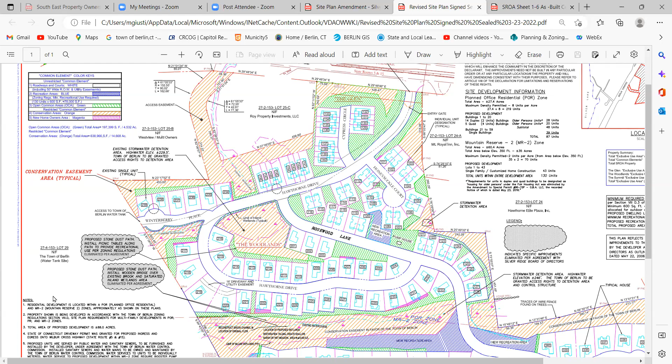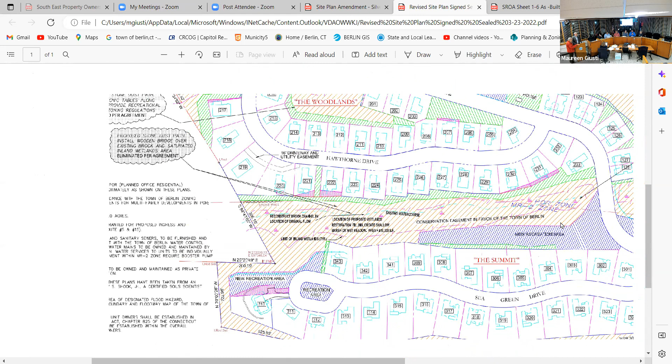We surveyed every aspect of the common areas beyond the lots, the units themselves, and determined that where there were some finished common elements with park, landscaping, trees, and the like, we were able to reconfigure and make sure that there was enough recreation area to satisfy the zoning requirement of 600 square feet per unit. So we had to relocate one of those areas, being landlocked and effectively totally unusable, to where there was finished ground that could be used for recreation purposes.

In doing so, we were able to delineate all of the conservation areas that were supposedly intended by reference to the lot line, where the woods would start or where the brush would begin. So this is what the new site plan in front of you shows. I'll get to that in a minute. Right, but that's what we did.

All right, can I just follow this clearly through its history. If I remember correctly, and I'll look at Tim, who served on the commission before, there was one developer that came in with the initial idea and then something happened, things were stalled out. Were there parts of that development that weren't built, or was this whole thing built up all at once?

At the very least, it was built in phases. I don't know if there was ever a different developer to start with. I know Mr. Klepacki was the developer I was aware of that was involved in the project. There was a change midway through to add 11 units, but other than that, I think Klepacki was it. All right, so that's probably what I'm thinking of, a change in developer.

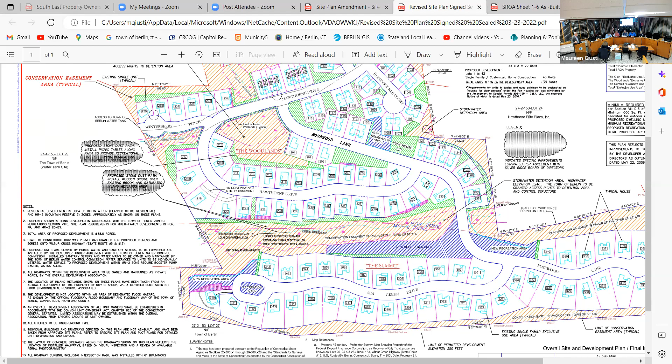Okay, so I'll go through there. The site plan that's amended does depict the conservation easement area boundaries as built, based on landscaping conditions. It changes the boundaries of the units to put the improvements within them like they were supposed to be in the first place. There's some orange wedges or triangles you'll see - we extended the boundaries of the end units of the Glen to include the utilities and landscaping, things that need to be part of the units there. And as Mr. Lamontagne mentioned, it relocates some of the recreational areas to a usable location.

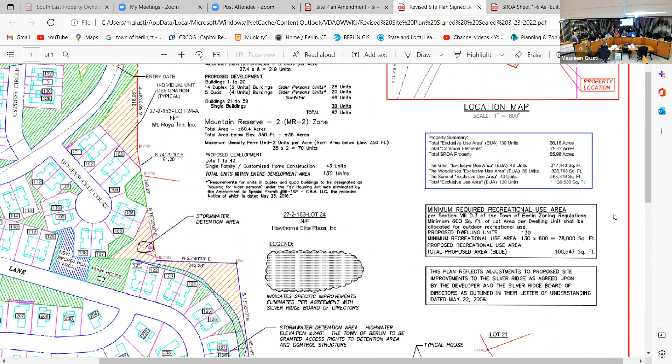So they do comply - all the amendments comply with the zoning regulations. Even with the changes, the amount of recreation area under 8D3A and B increased from 90,400 square feet to 100,647 square feet, for a net increase. The conservation easement area ends up at about 640,000 square feet in round numbers. But we really couldn't quantify it in the first instance because in the site plan it was all shown as typical with no boundaries, and it wasn't measured as approved.

There's no minimum amount of conservation easement area required under section 8B6. It just gives the commission the discretion to require it in the MR2 district. The commission did decide to require it. It was depicted as typical, and we're just trying to pin this down to actual boundaries based on what got built. But even if it shifts a bit, it's not as though we can't meet a minimum, because there is no minimum. The other compliance requirements are still shown in the table of the various dwelling counts and other things. So it does comply with the zoning regulations.

We request, like I said, the application of a waiver of the map requirements, because really there's nothing about parking, circulation, drainage, building relationships, landscaping, or anything else that's changed or will change. It's just the existing site conditions. Really, all that stuff that would have been on those other maps isn't necessary, and it won't prevent the commission from determining compliance with the regulations.

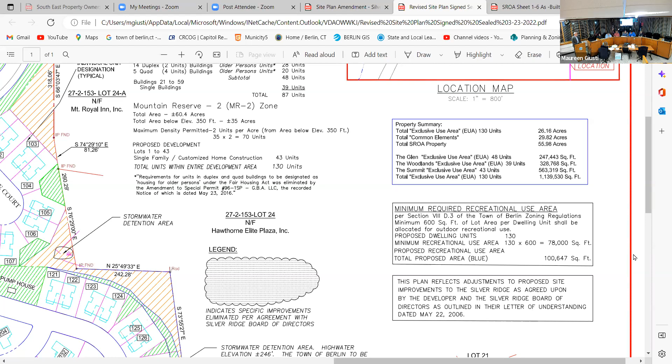So we ask for approval of the site plan as amended, and that the boundaries of the conservation easement areas as shown in the survey be sufficient for the conveyance of the easement to the town. The amount the association has spent so far in surveying is about $35,000, and just getting a running description for all those areas would add another $5,000. We believe the map will be adequate for the conveyance to the town, so we will gladly work with staff and corporation counsel on the conveyance.

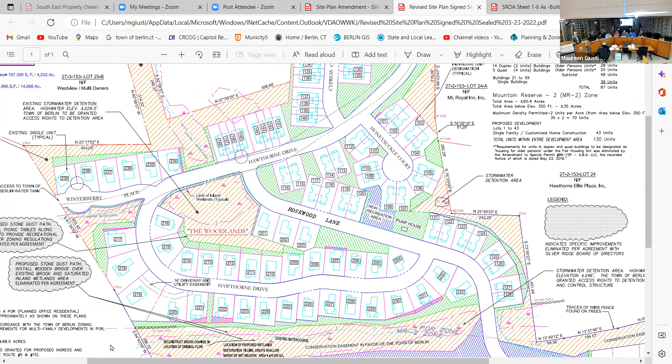Ultimately, if the site plan amendment is approved, the association will also approve an amendment to the declaration to make the new map the official survey of Silver Ridge as a common interest community, and will adjust the boundaries between the units and the common elements to clear up the encroachments. So that's where we are and how we ended up here. It really wasn't the association's doing - it's what got handed to them by the developer. We're just trying to fix this.

Yeah, I can see that. All right, Maureen, is there any - you want to go through your comments on this?

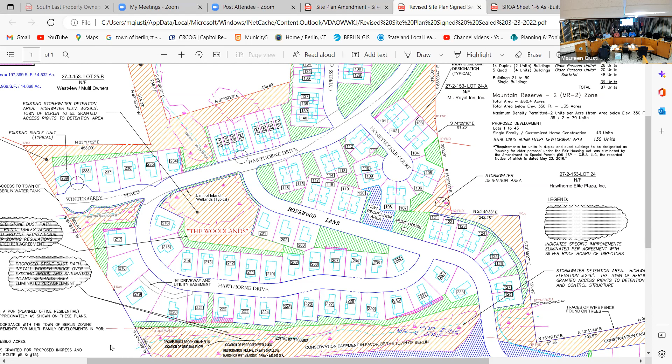So my comments were substantially just to help everyone understand that this is the 1997 original approval, and it was built out over the course of almost a 20-year period, before the houses along Sea Green at the top were built out completely and just finished fairly recently. So over the years, lawn areas - the landscapers maybe mowed a little more where it had been grassy or whatever.

I think the issues were initially found in this central area, which seemed to be the area most up for discrepancies between the original plans—this area over here at the end of Sea Green, where it had originally been designated as conservation, but the unit at the end encroached over. I believe there was an amendment, they came before the commission, there's a discussion item regarding them moving their driveway and encroaching into that area. If it wasn't handled by the commission at that time, it was handled by the planner.

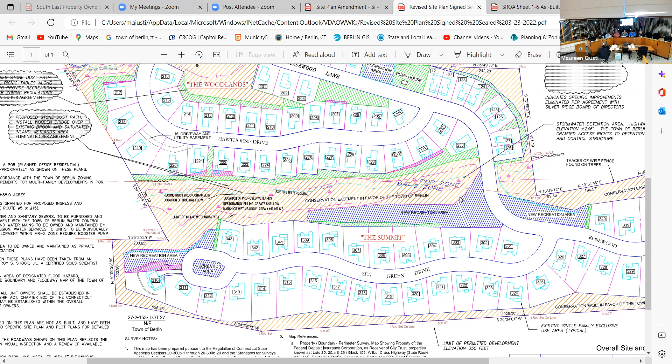So one of the reasons for the plan is to rectify that. This pink, hash-marked area will now become part of their exclusive unit area, and the green line of common area adjusted around it.

As I said, we did walk the area. I'll zoom in on that so you can maybe make it a little easier to see what we're talking about—that happened in several locations. We walked the area, checking for where there was growth, where there is open space or conservation area where wildlife isn't, what is actually landscaped and used as yards and/or landscaping, and where there seemed to be paths that people traverse.

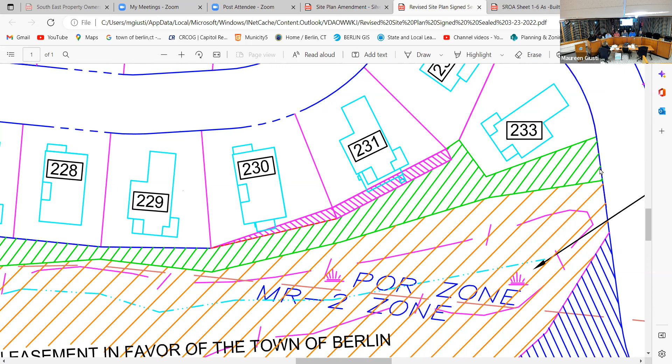As staff, Jim and I went through the plan fairly extensively a number of times, and have no exception to what they come up with. We really think it's a great idea to get the final as-built established as a unified plan.

You may have noticed on some of the developments that have come in more recently, we've started to put in our staff report that when they look to close out before the final bond is released, we get a final unified plan, at least per phase, so that we can see how houses orient to each other.

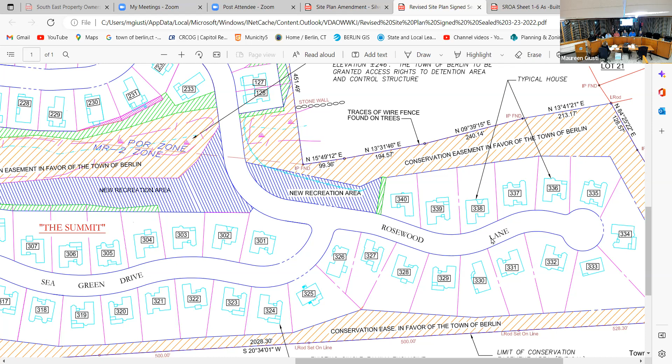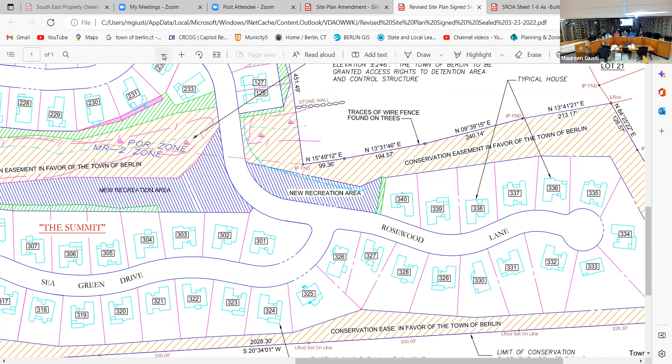Typically, depending on which development, structures must be a minimum of, say, 35 feet apart, or 20 feet apart. If you have a different building plan for each individual building, you have to pull both sides and the one behind to make sure nobody put on an addition that encroaches into that area. So the one unified plan is extremely helpful moving through time for staff.

I do want to make one clarification for anyone who might be interested or listening. You have the moratorium on multifamily developments—this is not for new units. This is rectifying an existing plan. There's no development application here, and therefore it's perfectly fine to have it at this meeting as a site plan amendment.

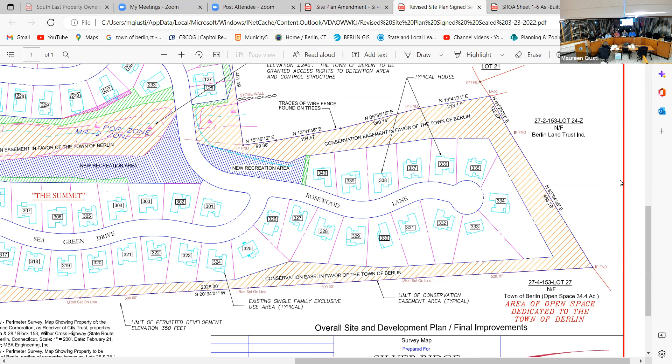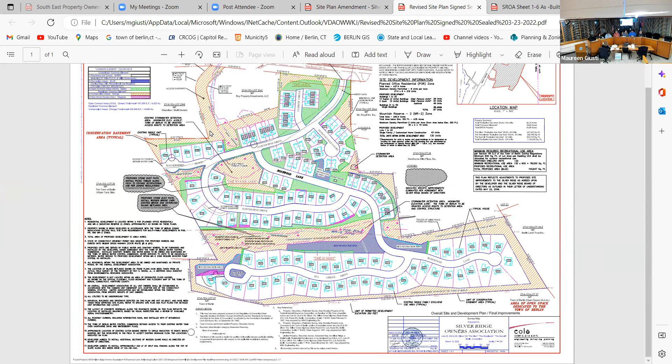So basically, we had a plan, then there were a couple of boo-boos in the plan that were discovered, and now this is an adjustment to the plan. However, as far as the conservation area, the town is satisfied that we're receiving equal conservation area as was requested with the original plan—it's just the lines defining those areas have to be adjusted. The designations of the common elements are adjusted and modified to match up what actually got built out, or additions that were put on units.

I would suggest that now that it's done, and like I mentioned about the area that got mowed when it wasn't supposed to be, that the commission condition it that conservation markers be installed to the satisfaction of staff. That's typically at angle points, as well as there's a minimum distance between the markers so that people know they're there, and that he'd be able to work with staff to figure out where those markers need to go. That the final plan and the easement documents, of course, would have to be filed on the land records regardless, but that it get filed on the land records.

I just want to mention that the Inland Wetlands and Watercourse Commission modified their 1996 application number 9610W on August 2nd of this year to reflect the as-built conditions, and they have made that approval. Conservation Commission asked that we not lose conservation area, and that they try to maintain corridors for any wildlife coming through. There are open space areas, town-owned lands adjacent, and we do have woodlands and wildlife in the area.

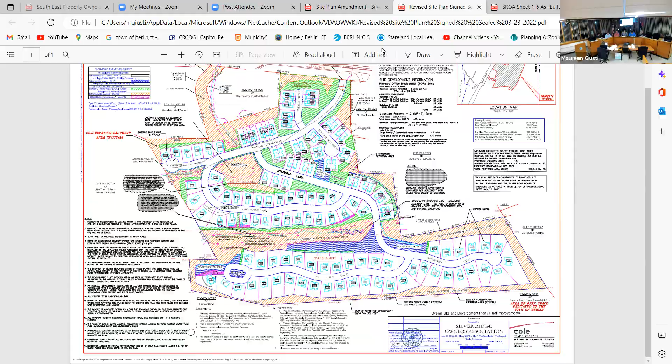And B, special permit / site plan application amendment of Peter Lapointe, Colvest / Kensington LLC, for the subdivision of the existing retail building to create 2 commercial spaces and a drive-through lane at 1041-1055 Farmington Avenue. The applications and related meeting materials are available at the Planning and Zoning Department, Berlin Town Hall.

240 Kensington Road, Berlin, Connecticut. Dated this first day of November 2022, Berlin, Connecticut. Brian Rogan, Secretary, Planning and Zoning Commission, to the New Britain Herald, legal notices / classified advertising, dates of publication: Saturday, November 5th, 2022, and Monday, November 14th, 2022. Thank you, Brian. Thank you, Brian.

Okay, moving into the public hearing, first up are the applications for 502-554 Berlin Turnpike Associates LLC: 502 Berlin Turnpike, Map 10-2, Block 83, Lot 13B; 522 Berlin Turnpike, Map 10-2, Block 83, Lot 13; and 554 Berlin Turnpike, Map 10-2, Block 83, Lot 14.

This was a combined public hearing, opened on October 6th and November 3rd, and it's actually being continued to 12/1/2022. So there is going to be no testimony heard at this meeting regarding that; we just have to move it through to continue on.

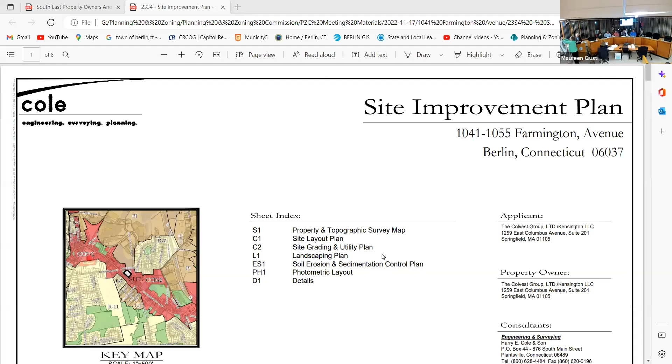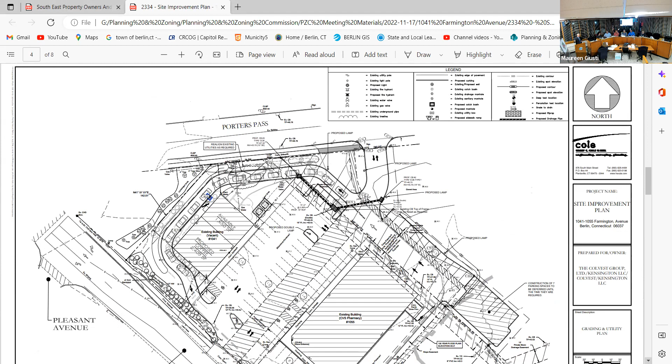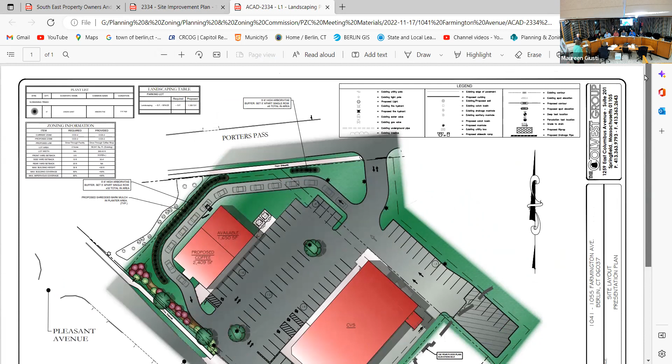Yes. Okay. In the plan set, but not colored. Okay, do I have it colored or not? Yeah, I do have them, but is that a separate document? That's one. Landscape, L1. All set? We're looking at L1, not C2. Okay, we have the L1 site plan on the screen that matches this board, but it also says L1 at the bottom, says that's one. The file was labeled L1.

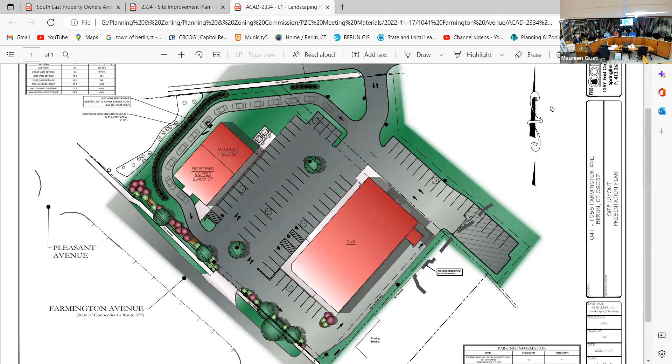Okay, hi, how are you doing? Doing great, thank you. For the record, my name is Peter Alter. I'm a lawyer, practicing law in Glastonbury at the firm of Alter and Pearson. I'm here tonight representing the applicant, Colvest Kensington, with respect to this application. In addition to comments from me, you will also hear from our project engineer, our traffic consultant, and a Colvest representative in support of and to provide information for our application. As a matter of housekeeping, I just want to reflect for the record that we've already provided to Maureen's office evidence of the mailing required for tonight's application, as well as evidence of the posting of a sign and publication. All is required and has already been made a part of the file prior to tonight's hearing.

The application that we filed seeks two things. One is a site plan approval for the redevelopment and reuse of the former Blockbuster Painter's Edge building, opposite the CVS pharmacy, that has been in place for a number of years. Those of you familiar with this particular site know that this building has been vacant for approximately 5 years. During this vacancy period, Colvest has been approached by a number of potential tenants, but in each instance, Colvest did not feel that the particular tenant seeking space was appropriate for this development, did not bring a high enough quality or economic viability to the property. So it deferred its development until it found what we think is a very suitable tenant for about 2,400 square feet of the space, leaving about 1,600 to be filled after the building is completely redeveloped, as you see on the architectural plans. Part of the new tenancy is to create a drive-through facility to service the new coffee business that will be established on the Farmington Avenue side of the property.

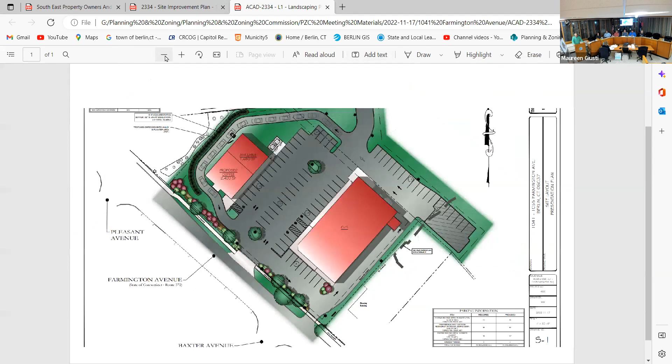Our proposal is to eliminate the original curb cut and construct a new curb cut roughly 75 feet to the east of the original driveway. This is done so we can extend the queuing lane for the drive-through, so we now have stacking for 14 vehicles, which is recommended by state DOT in that area.

The CVS is basically going to be unchanged in its location and its parking. We're showing a potential for 75 parking spaces to be constructed, but only 68 will be constructed. We're showing 7 spaces out in an area just outside the flood hazard area, which we're asking to be deferred.

In the event that the second unit, east of the building and just above the Starbucks, about 1,600 square feet, is ever fast food, that'll provide the necessary additional parking. But right now, the 68 spaces shown are sufficient for retail use in that area.

And in such time that that is ever needed, or if it is ever fast food, we would then go ahead and obtain the necessary permits.

That number one spot is within the flood hazard zone, which would be required from the Wetlands Commission to do. But I talked to Jim Warble on this, and he is comfortable with the way we've depicted it and not needing to go to the Wetlands Commission for this.

The drainage system is essentially the same as we had originally. Maybe Maureen, you could pop that up.

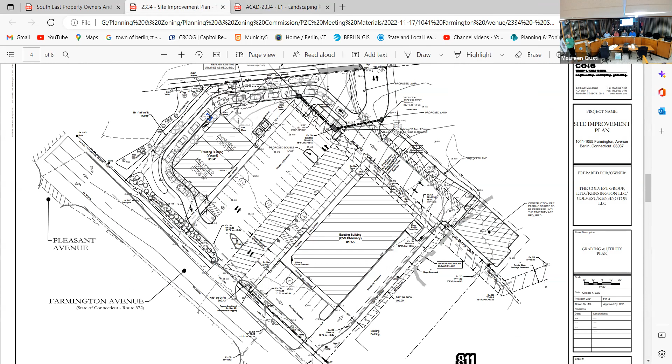That's going to tie into an existing drainage system that runs through the whole site and discharges out through the site. That was part of the original development plan, and those extensions, those catch basins, are natural extensions to that system. I've talked to the town engineer on this, and he's quite comfortable that we're really not changing the impervious coverage based on the original driveway.

The original driveway came out in this location, with the driveway positioned here, and to get the extended driveway, we were forced to move that curb cut over.

We are extending the sidewalk across to meet the new driveway, and since this property in this area, which is also owned by Colvest Kensington, is to be developed, there will be a comprehensive development plan that'll incorporate all the drainage and all the improvements there.

Again, I met with Mike and Jim this past month, and they were very comfortable with that. For those of you who don't know the history of this whole area, these are all old clay pits, so there's very little to no impervious infiltration potential in these areas. We kind of designed this original system based on that knowledge.

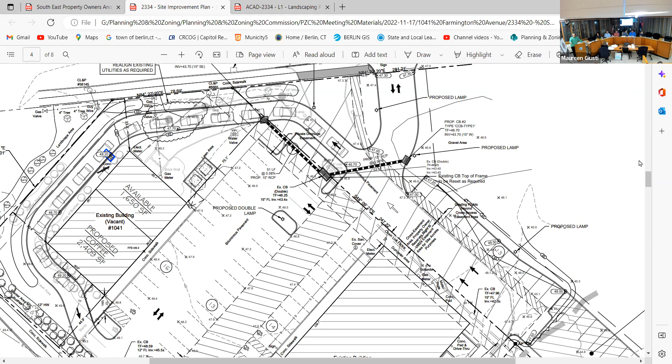The drive-through, as I mentioned, is 14 vehicles. We have existing very mature shrubbery and landscaping plantings in that area along Pleasant Avenue. We are not touching that, and that'll help screen the drive-through pickup window.

There is some vegetation, a couple of burning bush rows located in those areas. Because those are invasive species, we are removing them. But we are planting a row of 38 arborvitae in this location to help screen the cars queued up, and another row of arborvitae to help screen the headlights of cars coming through the turn so they don't shine across the roadway. We're trying to do our best to screen vehicles and headlights in those areas. The pickup window and order window will be there with all that screening, and we feel the impacts on the neighborhood would be very minimal.

Tim may remember that area near Volunteer Park was an old Northeast Utilities substation. It was quite ugly. It was about time we developed this site so that was removed and Volunteer Park was built. There's existing vegetation along that side, and the removal of the burning bush with the replacement of arborvitae will provide necessary screening. You honestly won't see that building coming from the south side - it's well hidden.

We're proposing 6 to 8 foot arborvitae in those areas, so we're looking for a nursery variety, not a home depot type. The parking is going to remain the same, and the curb cuts on Farmington will remain the same.

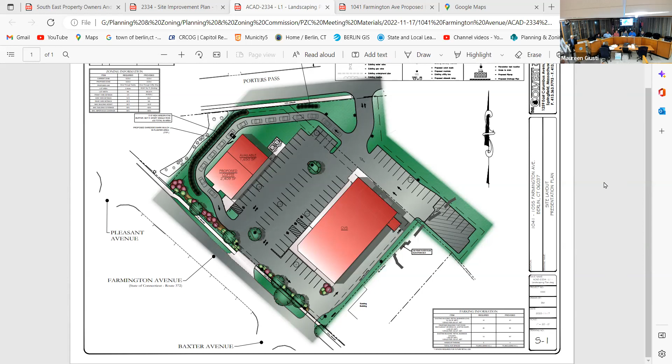I'm the kind of person who likes to go in and order my coffee, only because I just can't stand the noise and volume of that box. So my concern is, if you have this order box located right near there, how long does it take to order the coffee, and then how long do they have to wait to get it? Because it seems like it's only 2 car lengths later and bang, you're right at the window. What will the volume be? I don't want to disturb people who might be sitting and enjoying their Starbucks coffee in the little park.

If I might, it's actually set back 1, 2, 3, 4, 5 car lengths for the very reason you mentioned, which allows the people inside to have the drink prepared by the time the car gets to the drive-through window. Starbucks has this down to pretty much a science in terms of how long it takes from the point you order to the point you pick up. So it's really at their direction that the order facility is placed far enough back.

We are very much aware of the concern commissions have with drive-through facilities and the order conversation that goes on. Starbucks has done a good job containing its volume in the interplay between the customer and the person inside. In addition, we positioned it well in terms of the arrangement, because we are planting a pretty thick hedge of arborvitae, and what's immediately adjacent to us is the park. We're not intruding into a residential backyard; no one lives right on the other side of our property.

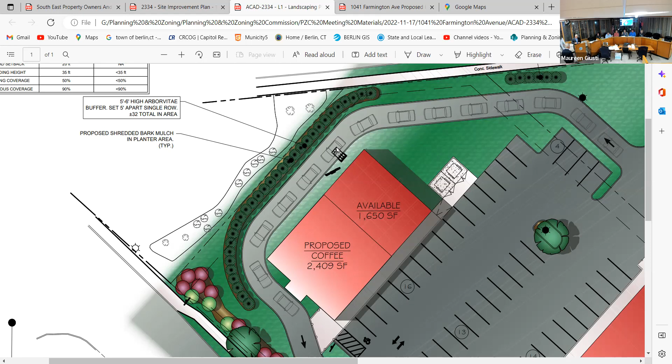What you've done with the HardiePlank, I like, but we need to somehow... it's missing a layer of something, and I'm not sure what that is. I don't know if it's just awnings or the perception of windows as opposed to brick. I'm not quite sure, but it just needs something.

And I neglected to mention, we have added awnings to the building, both on the storefront windows, at the drive-through, and on the back of the building where we are proposing to install 2 brand new doors, which would be the back doors to the 2 tenant spaces. We would put an awning over each one of those doors. Right now there's only 1 back door on that building, and that was the rear exit for Blockbuster.

Looking at the design of it, you have the faux front, you have that extension that rises above the roof line. What's happening in the back of that building? Am I just looking at the blank side of that faux? Over the arborvitae, you're gonna see this HardiePlank all across the back of the building. So you'd be looking through the park, you'd have to look over the arborvitae, and that's pretty much what you'd see.

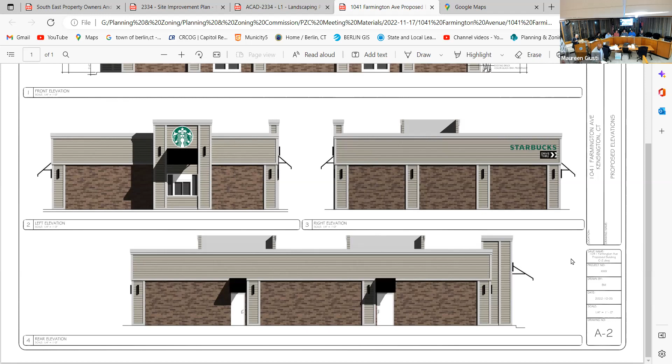Yeah, okay. Okay, any other questions or comments? All right, so...

Yeah, I think a couple of revisions are in order that I would like to see, so I'll make the motion to... or staff comments, I'm sorry, put the cart before the horse. I'd like to get my two cents in. I'm sorry, thank you very much.

So I just want to point out a couple of things. The engineering comments are pending. Our engineer was out sick today, so I didn't get to follow up with him regarding whether they're in an inbox somewhere or not. Again, I reiterate, DOT would have to have purview over the review of the plan regardless. And planning staff is continuing to review the details.

I was going to note that it sounded as though you were asking for a couple of details and revisions. So those could be incorporated if you keep the hearing open.

I do support the deferral of excess parking. It's written on a number of plans where it's deferred as long as they have the space set aside on their site plan, and if parking becomes an issue, the ZEO can make the call that they have to add parking. Keeping some land green if it's not necessary to pave is something we strive for.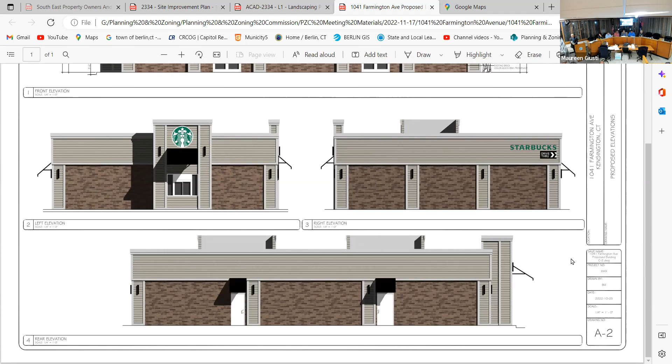Okay, so now we're going to circle back on the Thomas Hope Brothers case. So we did get a text back. We got a report earlier this week that the yellow public hearing sign was down on the property. We notified him, and he responded to the text that he understood that was going to force postponement of the hearing.

So in granting the postponement, I believe Commissioner Jersey noted that the hearing was open, so you have 35 days to close it from the time you open it. So I would say no extension of time would be necessary.

So where's that motion? Yeah, that would be appropriate, as long as that's acceptable to the commission. Like I said, we've been in constant conversation because of different issues. Okay, so he put the sign back up, and I got a photograph of the sign.